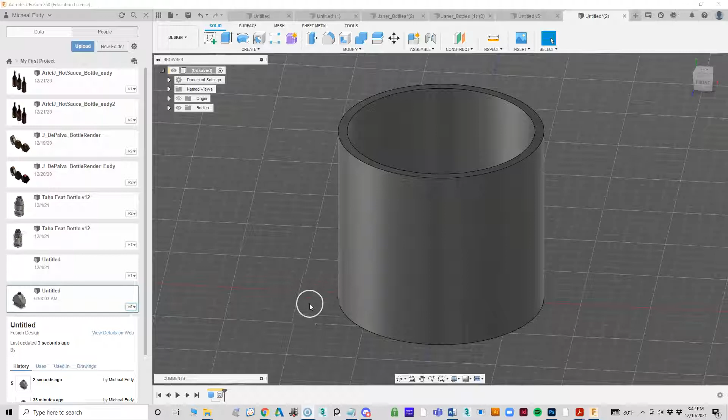Okay, what I want to show you here is how to create threads for your bottles. Now, initially what you might think is you want to go in here and do threads, where we can come in here, pick our surface, and create some threads. Really, this is not the way you want to do this for a bottle, because these threads are for metal objects, like a bolt or a screw. So this is really not what you want to do when you're doing a bottle.

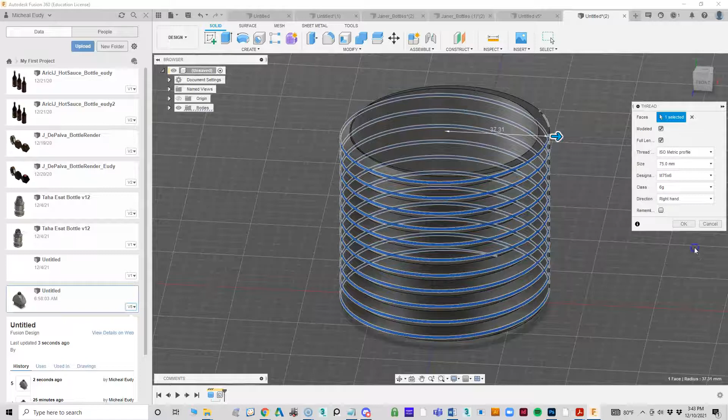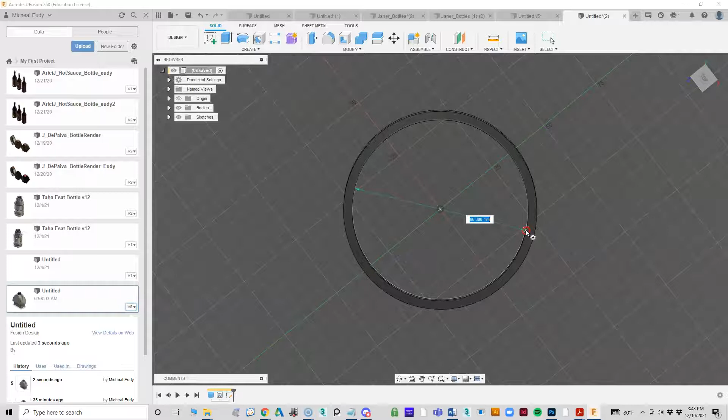The better method is to come in here and do a coil. Okay, so we want to start off by placing the coil on this plane, and we're going to place it at the bottom. And then we're placing these on the outside. This is like the neck of the bottle. So I'm gonna let this interpenetrate just a little bit. So it's going to go into it a little bit, and then we're going to get something like this.

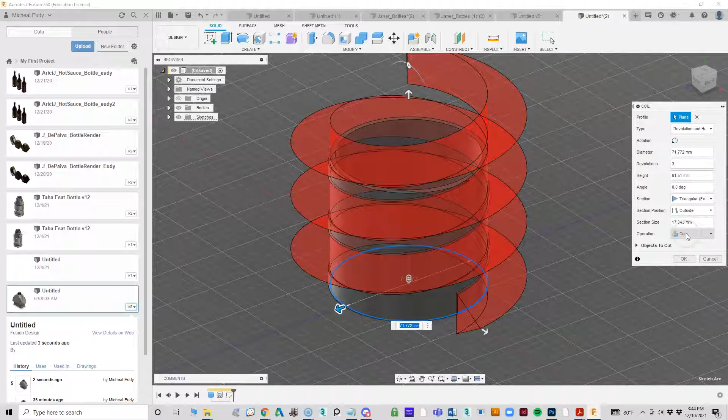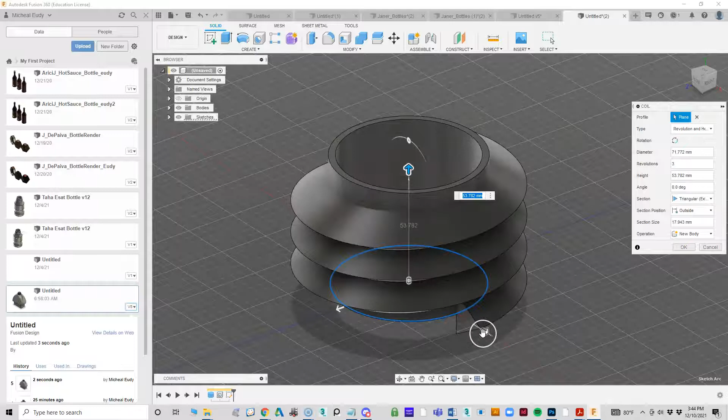Now, it defaults to cut. We don't want to cut, and we don't want to join. What we're going to do is make a new body. Now, you can decide here how many turns you want, and then I can grab here and pull it down, so this is actually going around your object. And we can pull here to determine how far we want the threads to come out.

Now eventually I'm going to come in here and fillet this edge, because these are way too sharp, but this will get us started. Okay, now we don't want to join it. We want to create it as a new body because we want to be able to manipulate it. You can determine how many turns you want. 3 turns is pretty standard, but you can do more turns if you want to.

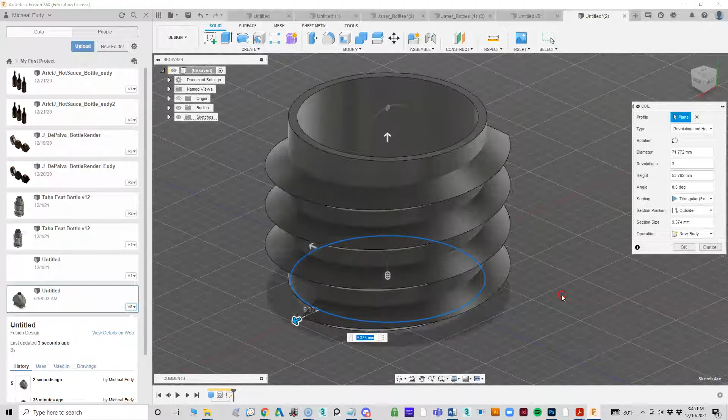Now by default, this is set to circular, and what we want is triangular, and we want outside because we're putting them on the outside. You would use inside if we were putting this on the cap. And then I'm going to squish this down a little bit more, and I think that's okay. I just need to make sure it was clipping in, which it is. And I'm going to click OK.

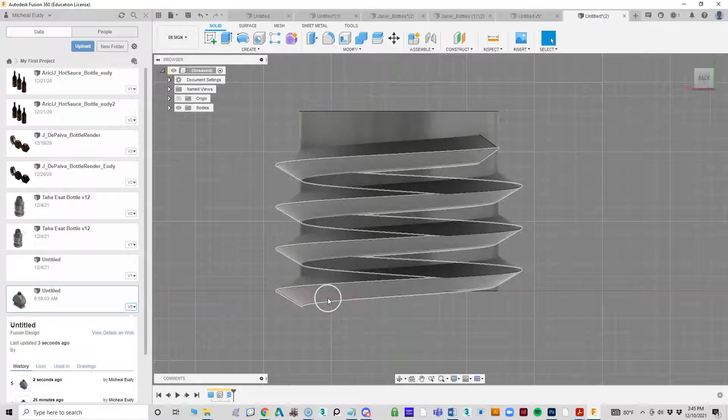All right, now what I need to do is move this up so it's not going around it here. So I'm going to go to move, pick it, and then I can slide this up. And then there it's going around it. Now I want to leave some space at the top and the bottom, and so this looks pretty good. I might go in and readjust it a little bit.

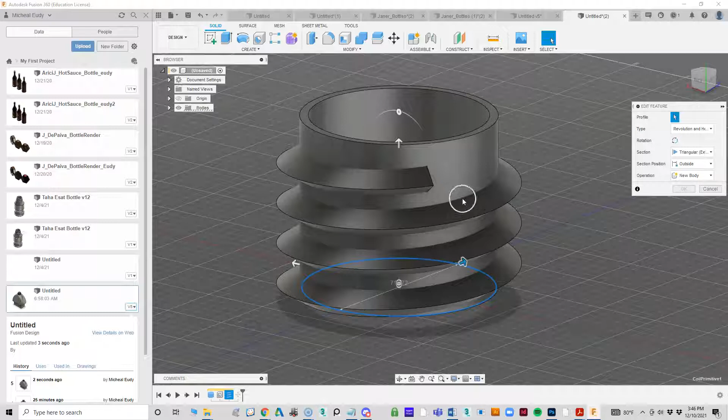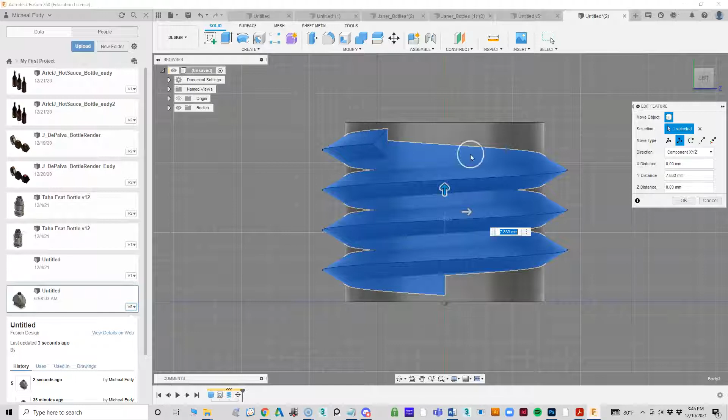I'm going to go back and edit the feature, and I'm just going to bring it down a little bit more, set that in, edit the position, and then move it back up a little bit. So I'm trying to get it where this distance and that distance is about the same. You can always come back and adjust it. And I don't want it to go right to the edge. I want a little bit of space in here because I'm going to fillet this. Okay, so that looks pretty good.

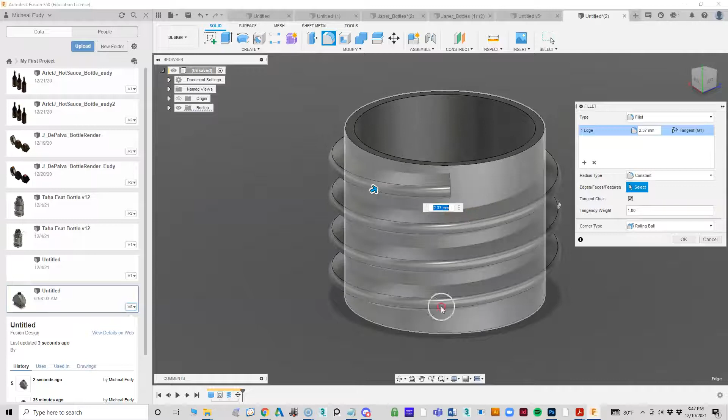All right, so the next thing I want to do is come in here and I want to fillet this edge. So I'm going to come in here and I'm going to go fillet, and then I'm going to fillet the edge by pulling it in so I get more of a rounded, which is better for plastic or glass. Now, eventually what we're going to do is attach this to it, but I want to show you there is a difference if you attach it first.

So you can see how this is nice and rounding this. But if I cancel this, and what I do right now is I join these two together. So I pick this and I pick this to join these together. And now I come in here and I do the fillet. You'll see it keeps a much sharper edge to it, which I don't really want.

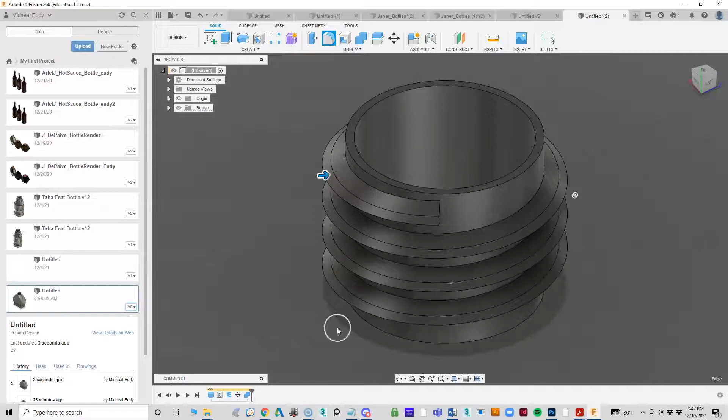So I don't want to join it, so I'm going to delete this join until after I've done the fillet. Okay, so pick the edge again, and we're going to do the fillet and pull it in so we get a nice rounded look to it.

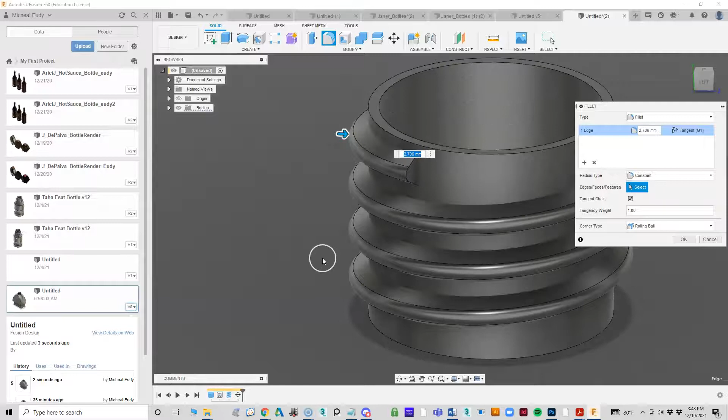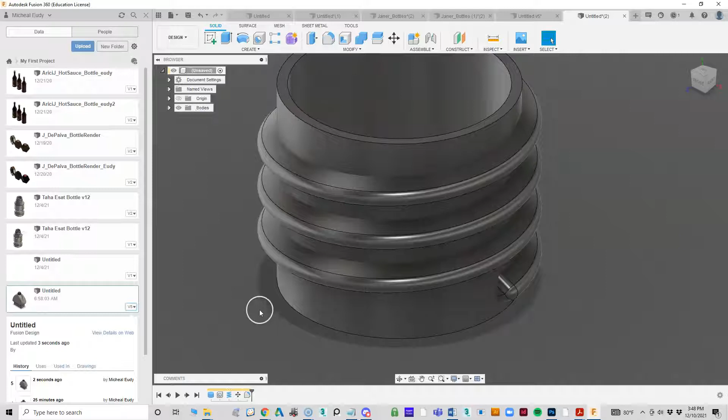Now another thing I want to do is I want these ends rounded too. So I'm just going to hold down the control key, and then I'm going to pick the end here, and then I need to go around over here. Hold down the control key and pick these two there. And then that's pretty much what I want right there. And that's a nice rounded edge.

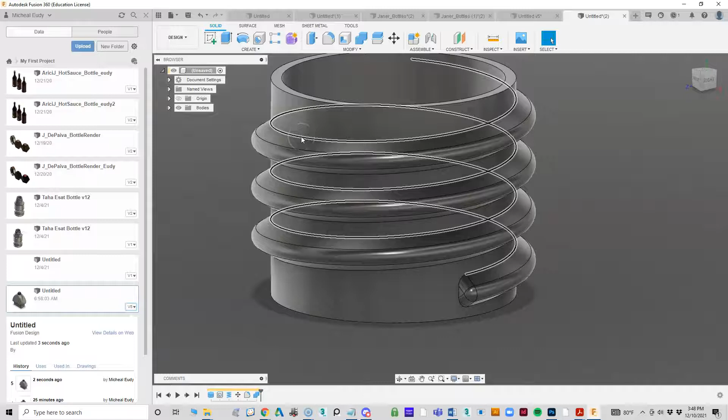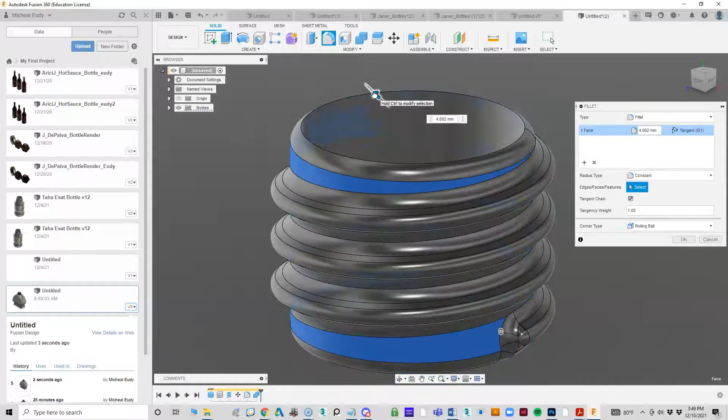Okay, so now I want to combine these together. So I'm going to go here and there and combine those together. And then what I want to do is I need to get a fillet on this inside edge. Now you can go in here and grab the edge to fillet it, but another way to do it is fillet the surface. So if I go up here and I go modify fillet and I pick this surface, now when I go in here and I start pushing a fillet in here, it's going to do fillet for the entire surface. That's too much, maybe something like that.

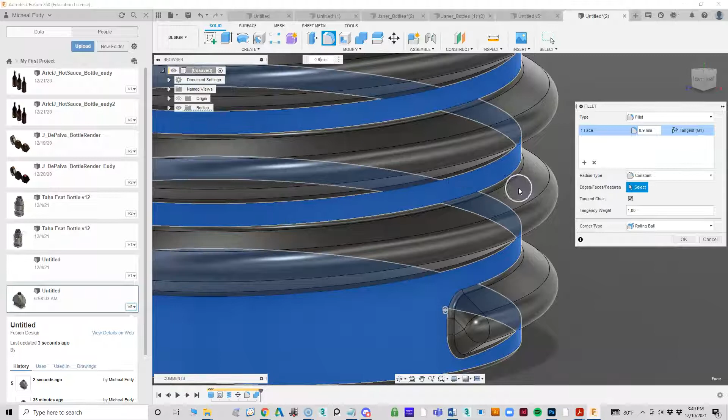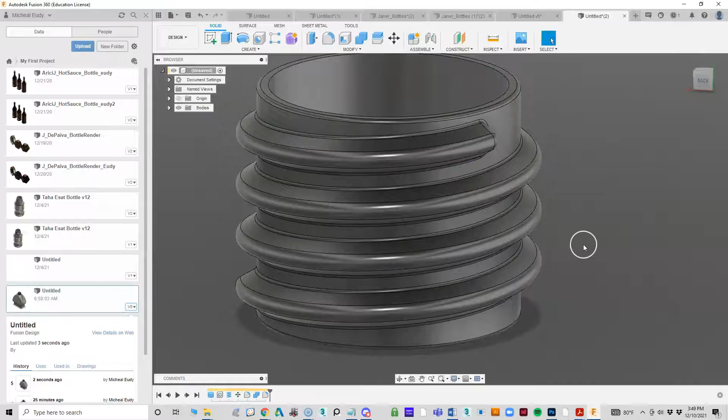So it's giving me a fillet on the top, softening it, and it's also filleting around that, and it's filleting around my edges down here too. I may go a little bit more. And let's look at, we're going to try one. And I think that looks pretty good. And I'm going to go with that. And now that will soften that transition all the way through there.

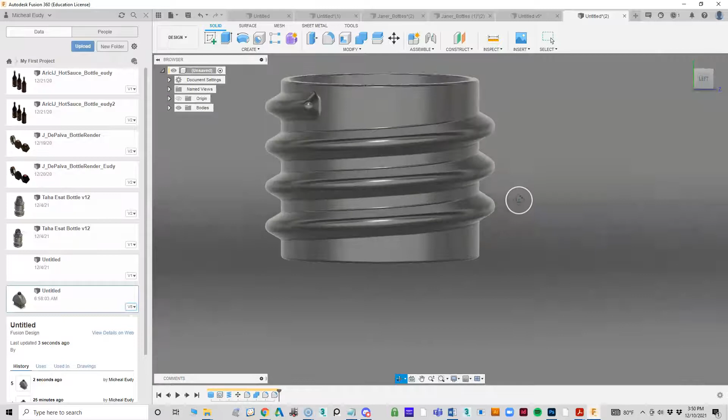It gives me a little bit on my lip there, and of course, eventually what I'll end up doing is coming back and I will fillet this in here as well, so that nobody cuts themselves on the glass or the plastic. And that's how you create your threads for your bottle, whether it's a glass bottle. Some of you are doing glass bottles, some are plastic bottles, and so we want a fatter kind of a thread. And so the coil is the better way to do it, not thread.

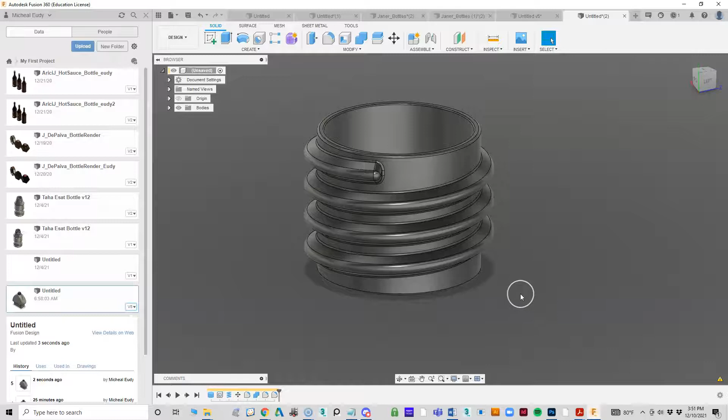Use coil. And there were questions about right-handed or left-handed. All threads are right-handed in the United States, unless there was some reason somebody wanted something to be able to screw together counterclockwise, which does happen sometimes, but we want to be able to screw it clockwise, so it'll be right-handed. So that is how you make threads for your bottles. Hopefully that helps you guys.